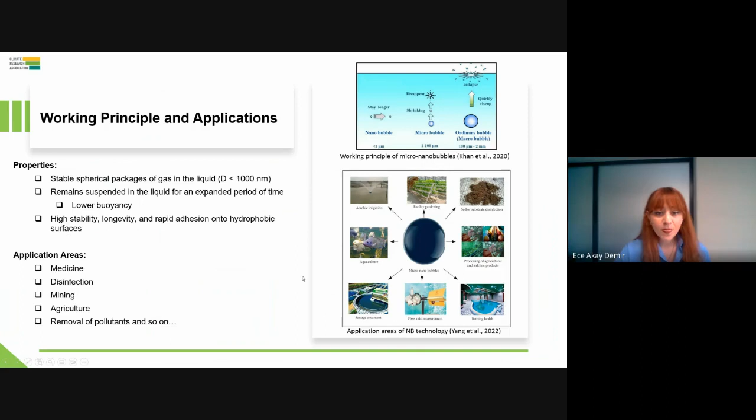If we look at the application areas or sectors more deeply, in agriculture or horticulture, they improve water quality, promote root development, foster plant health, and lower treatment costs. In lakes and ponds, they are more resilient to algae blooms, providing healthier lakes.

In anaerobic digestion, they enhance the rate-limiting steps, increase water mobility, and enhance substrate digestibility. In aquaculture, they improve fish and ecosystem health, maximize fish growth, and therefore lower the operating costs.

In the oil and gas sector, they can be cost-effective, causing chemical reduction and water recycling, and reducing chemical use. In mining, they accelerate the leaching rates and therefore provide extraction efficiency.

In the wastewater treatment sector, they can also be used in different stages of treatment like aeration, flotation, or disinfection. In aeration, they can improve oxygen supply efficiency and degradation of pollutants. In flotation, they can increase collision probability and separation efficiency. Lastly, in disinfection, they provide approximately 99% faster reduction rate, lower ozone requirements, and smaller tank size.

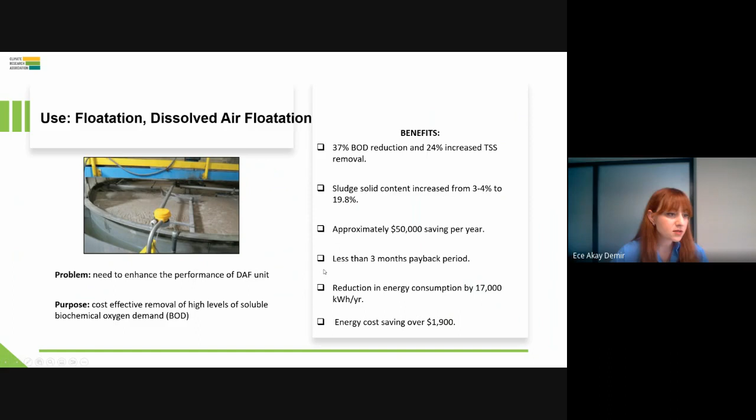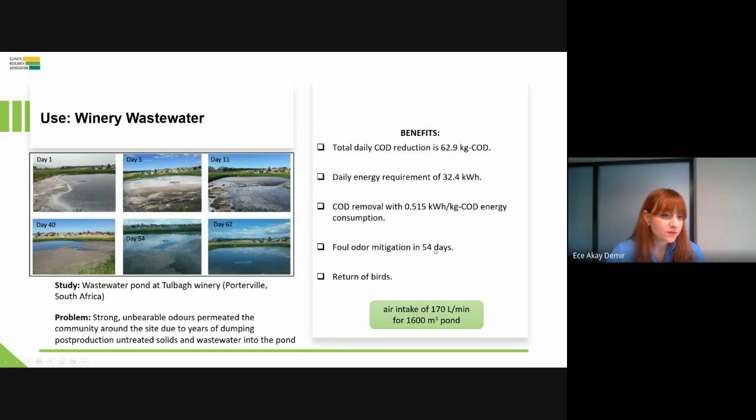Another example is winery wastewater. This study was conducted in South Africa. The problem is strong, unbearable odors permeated the community around the site due to years of dumping, because they discharge their winery wastewater into this pond. They used a nanobubble device with air intake of 170 liters per minute for this pond with a volume of 1,600 cubic meters, and they achieved total daily COD reduction and reduced energy requirement. COD removal is higher than the current station, and full odor mitigation was provided in 54 days. Therefore, birds returned to their natural habitat.

Another example is aeration of an oxidation ditch at a municipal wastewater treatment plant. The problem is the heavy wash down made it impossible to raise the oxygen level, resulting in improper treatment. The benefits are rapid installation, delivering more oxygen than needed, and enabling operators to easily switch between pure oxygen and air. Dissolved oxygen is increased from 0.11 ppm to 3.6 ppm in the outer ditch, and sludge amount is reduced as expected.

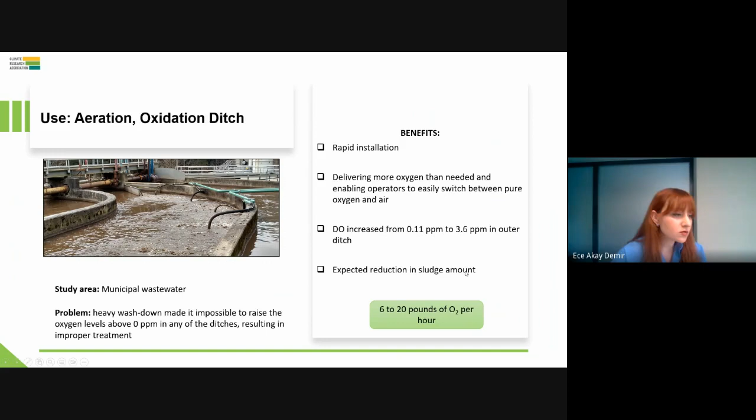Another example is from the oil and gas sector. The study is conducted for an oil separation process, which varies between 80% and 90% effectiveness, resulting in oil loss. They use nanobubbles and increase the oil recovery rate by approximately 15%.

They also reduce the produced water volume, lower produced water transfer volume, reduce use of chemicals to treat emulsion, reduce oil transport demurrage, improve oil and water transport scheduling, and reduce site supervision, saving about $15,000 in 60 days. The yearly potential revenue is about $100,000.

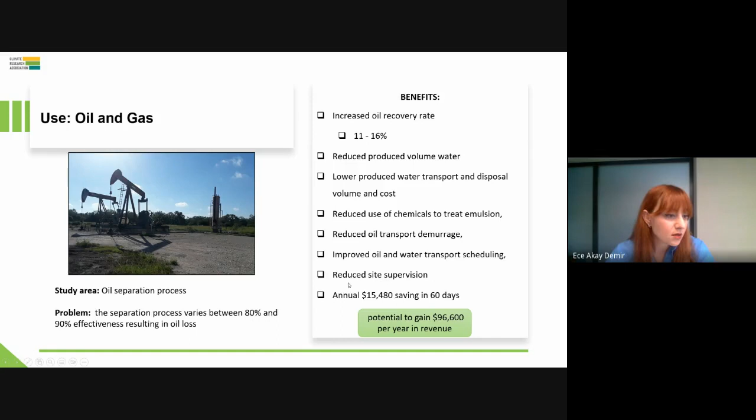Lastly, in the agriculture sector, the study area is a greenhouse that recirculates water, including nutrients and dissolved oxygen, to the roots of the plant. The problem is delivering enough oxygen to plants, so they also use nanobubbles, providing about a 300% DO increase.

The payback period is 16 months, which is slightly okay. Cultivation time is reduced from 10 weeks to 8 weeks, and total revenue increased. As a final result, they have healthier plants and larger roots.

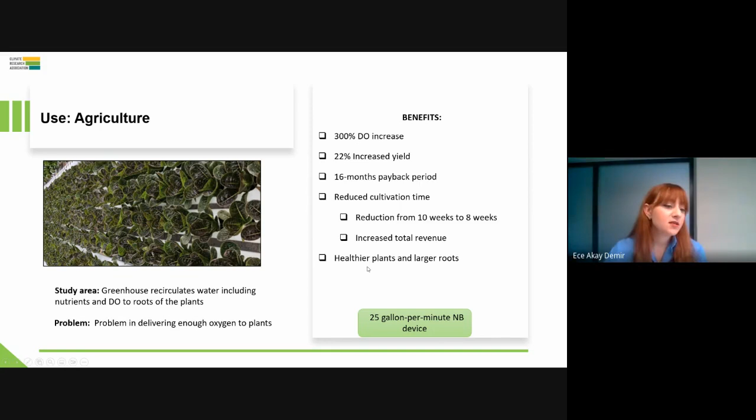We examined such examples and studies and merged approximate results in a matrix here. As you can see, in lots of application areas the process efficiency is high. Successful practice examples exist in the world, cost savings are high, and payback periods are very low. As mentioned, in the wastewater sector, application areas are divided into three processes: aeration, flotation, and disinfection. The results are also very good.

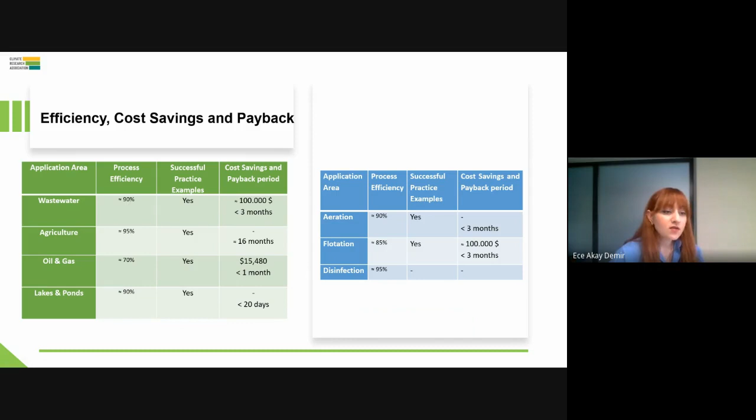Now I want to go through Turkey and its potential, because climate change effects on water are felt significantly, as in the whole world. Therefore, usage of nanobubbles in the wastewater sector might be valuable, so we analyzed it deeper.

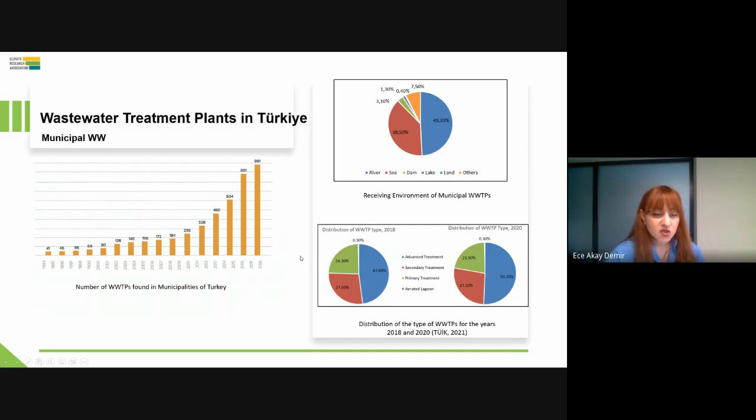In this respect, we held lots of stakeholder meetings with organized industrial zones, industries, and municipal wastewater treatment plants, and took feedback from them. Some sectors, like textile or plastic packaging, have very water-intensive processes and need feasible water recovery actions.

In the majority of firms, the major water consumption area is green area irrigation. Some of them have plans to use only recovered wastewater in their processes, but most can't achieve this due to lack of technology, lack of budget, and such problems.

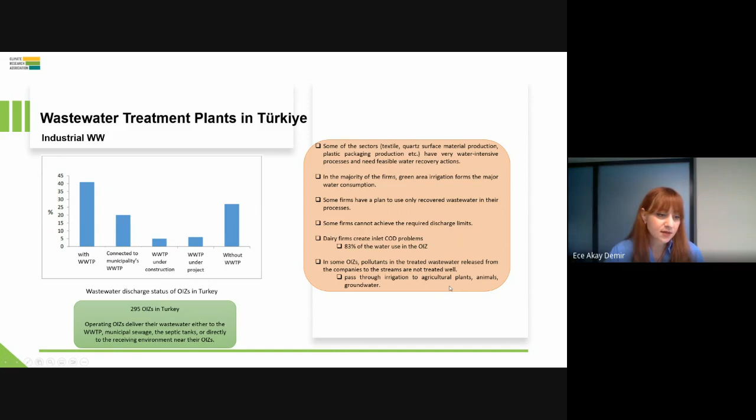Some firms cannot achieve the required discharge limits. For example, dairy firms create inlet COD problems, and 83% of water used in the OIZs comes from there. In some organized industrial zones, pollutants in the wastewater released from companies to the streams are not treated well, and due to this it passes through irrigation, agricultural plants, animals, and finally, unfortunately, groundwater.

In this respect, nanobubbles will provide not only more effective treatment of water and water recycling, but also protection of natural water resources, because these basins mostly have low class in terms of water quality. These classes and basin prioritization are determined by the Ministry of Environment, Urbanization and Climate Change in Turkey. The list order shows the Akarçay, Meriç-Ergene, and Gediz basins are prioritized in terms of pollution.

Looking deeper, in the Akarçay Basin, water resources are under significant pressure from urban and industrial discharges. Advanced treatment and effective biological treatment procedures must be implemented, as most water parameters exceed the limits, which is a problem in this basin.

In the Meriç-Ergene Basin, pressure from industrial wastewater and untreated or insufficiently treated urban wastewater discharge is a problem. A significant portion of the COD load comes from industry, and some parts of the basin are heavily polluted, for example the Çorlu stream; Ergene is a very big problem in Turkey regarding this.

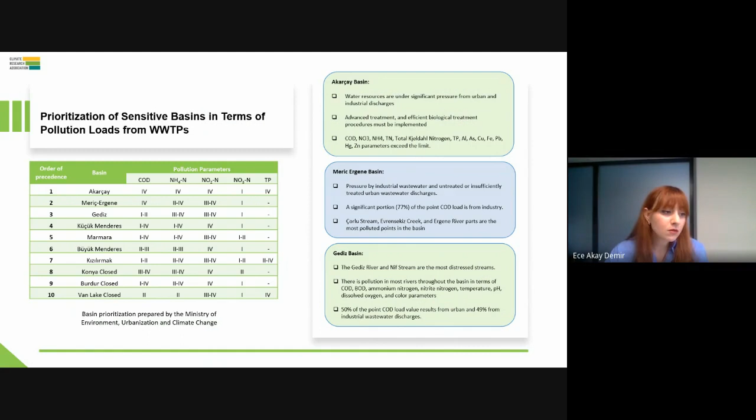So if you want to protect natural resources and provide water recycling in order to conserve natural water resources, we need to take some technological renewables. And to come up with the final notes, I want to mention needs and potential, to summarize this.

We aim to focus the water sector to transfer this technology to Turkey, because organized industrial zones with high water consumption and water scarcity, along with sensitive basins especially, should be focused in terms of the commercialization of this technology.

The wastewater originates from industrial organizations, and discharge of this wastewater into the receiving environment without treatment causes excessive pollution on the soil and vegetation due to the water pollution created. Heavy water consuming and highly pollution loaded organizations lack the capacity to treat the wastewater generated sufficiently, in terms of both quality and quantity.

It has been seen that in almost 50% of these sensitive basins, the pollution load problem occurs due to discharge from organized industrial zones into the receiving bodies. This ratio is expected to increase because organized industrial zones are not operating at full capacity by now, mostly organized industrial zones in Turkey, but they have very high potential. Therefore, the increase in water consumption is expected.

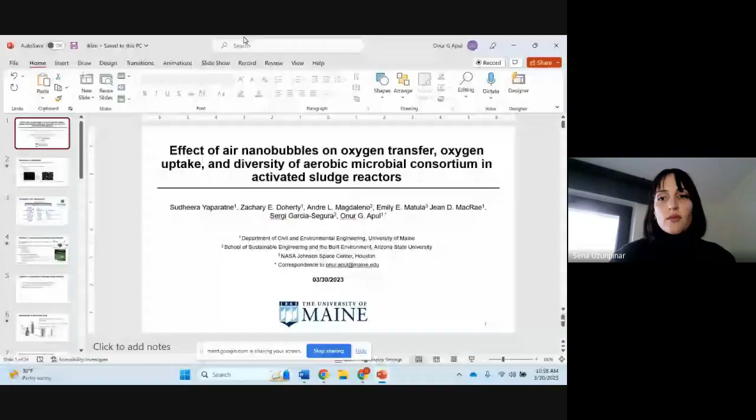Okay. All right. Are you able to see my whole screen as a slide? Yes, we can. Okay, well, thank you. Thank you again for organizing this. This is a very exciting project.

I'm going to present a lab study about nanobubble aeration for wastewater treatment. This study is led by Sudheera, a postdoc in my research group. My name is Onur Apul. Our group is at University of Maine, but as you mentioned, our collaborators are at Arizona State University, and the study was also first instigated by NASA Johnson Space Center.

This work is on the effect of air nanobubbles on activated sludge. I'm going to give some details about oxygen transfer, oxygen uptake, and diversity of the microbial consortium after nanobubbles versus traditional aeration. Most of these slides are prepared by Sudheera, and some at the end are prepared by my PhD student, my graduate student, Ashton Collins.

So I don't think I need to go through the definition. Obviously, nanobubbles present an opportunity because of their small size and lack of buoyancy. We didn't really believe they existed until very recently. Nanobubbles were a matter of debate because, being so small, their internal pressures would be very high, and they may implode or dissolve under this pressure. But in fact, we use some modern technologies to determine they actually exist, and their lack of buoyancy makes them not only exist but stay stable in a solution, in a suspension, for months, weeks.

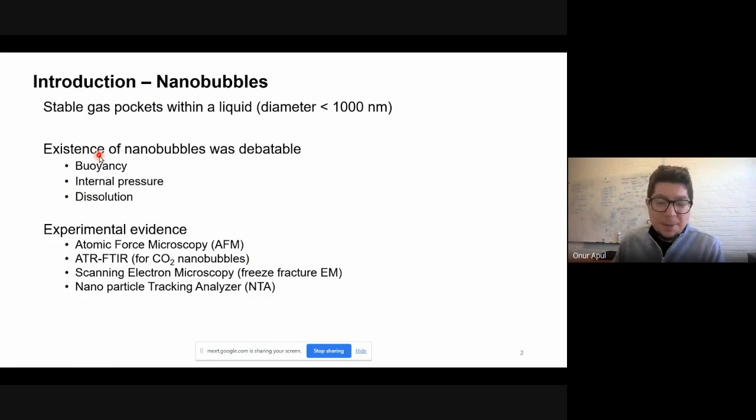So I think the best description is these videos. This one is taken by our collaborators at Arizona State University. This is a nanobubble, with a scale bar of 1,000 nanometers. You can see roughly a 100 nanometer bubble. With the flow direction, the bubble is moving, so you can see the contrast against the background. This is taken by a nanoparticle tracking analyzer.

This next video is from literature. It gives a more stark description of the stability and their independent Brownian-like motion. They are not impacted by each other. They are stable, just moving, vibrating a little bit. But as you can see, this technology can overcome the thermodynamic limitations of gas solubility.

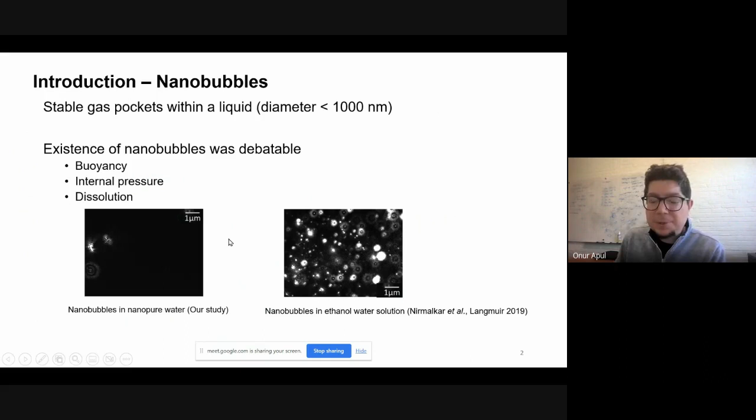If you can pack lots of bubbles in separate domains in water, then you are actually overcoming the solubility limitation at given temperatures. This gives an immense potential of application.

Typical aeration procedures suffer from large bubbles quickly rising to the surface from diffusers, and then on the surface they pop and disappear. Basically you have a pocket of gas, and you use this gas as a means to transfer the interface, to transfer gas into liquid. But since the bubbles are large, their retention time is really small. In a few seconds, they leave the reactor, and that interface is limited to the surface area of this bubble. Large bubbles mean small surface area, short retention time, and basically you are spending resources, money, air, to aerate.

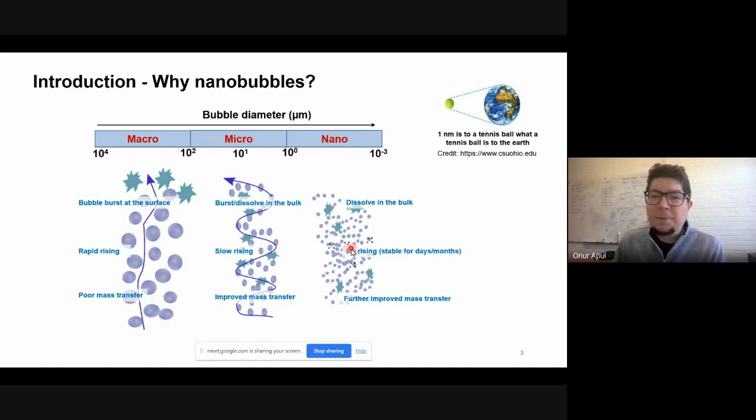There may also be a potential of transferring liquid phase compounds into gas phase in the form of aerosols, so pharmaceuticals and other concerning pollutants may be transferred through the surface of the reactor. Microbubbles have been implemented to decrease rising speed and increase mass transfer with increasing surface area, but they still suffer from short lifetimes. The transformative change is non-rising nanobubbles, as you saw in the video, basically moving in solution, and the extremely high surface area causes a further improved mass transfer.

For a general audience, activated sludge is a biological system where you have aerobic microorganisms and wastewater. The aerobic microorganisms use oxygen as a terminal electron acceptor and organic pollutants as electron donors through biological conversion. Basically they use nutrients, oxygen, and food, grow into biomass, and form carbon dioxide and water, mineralizing these pollutants into carbon dioxide while forming biomass.

To capture more food, they typically get more sticky on the exterior with a polymeric substance, meaning they eventually form a large flocculated biomass that settles down. That's how wastewater treatment works. Of course, oxygen is a key component - the more oxygen you provide, the better destruction of organics and the better growth of aerobic microbes.

A typical wastewater treatment plant, like our local treatment plant, is a 4.5 meter deep tank. At the bottom, you have diffusers. These diffusers are membrane type, so they blow up like a balloon as the pressurized air goes through, and they provide oxygen in the form of large bubbles.

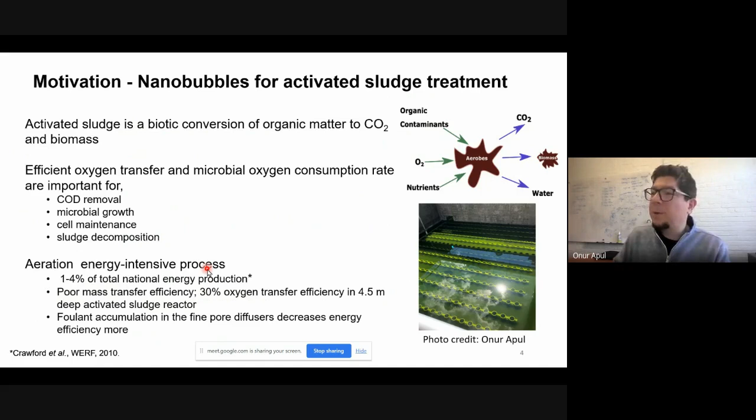That's why we think nanobubble technology presents an opportunity in terms of improving mass transfer without disrupting the microbial activity. Of course, microbial activity is not just one type of microorganism, it's a community of microorganisms doing the job together, so with nanobubbles we don't want to disturb this. Also the biomass eventually settles down - the solid sludge, we call it sludge - and the sedimentation also should not be disrupted.

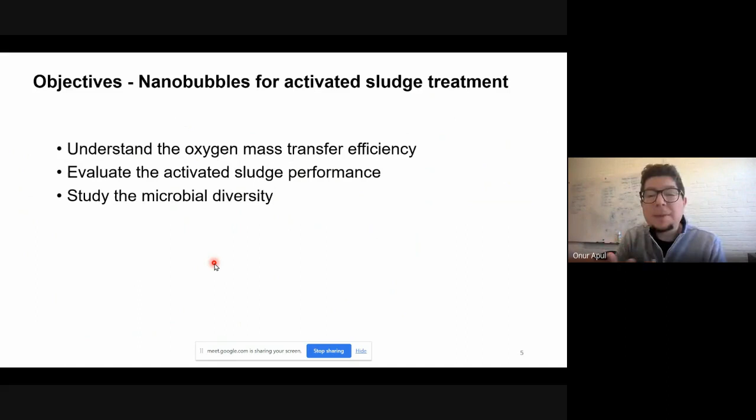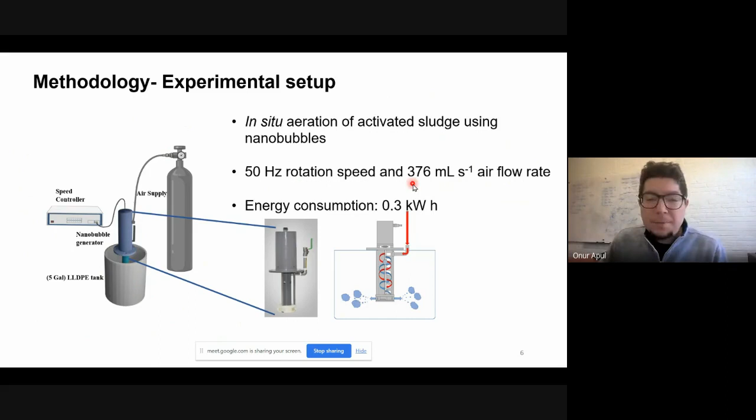So we did a bunch of systematic experiments in a bucket with a nanobubble generator. We used nanobubble aeration in situ for this batch reactor, providing this amount of air with and without nanobubbles to compare if nanobubbles make a difference.

Here is another video. This is nanobubble aeration - as you can see, that creates a vortex with this line. This white line is the gas input, this black one is power input. So you basically create tiny bubbles as this nanobubble generator operates.

And then we just take this offline and bypass it, applying the same amount of air in terms of regular bubbles - small enough that both of these reactors are fully mixed.

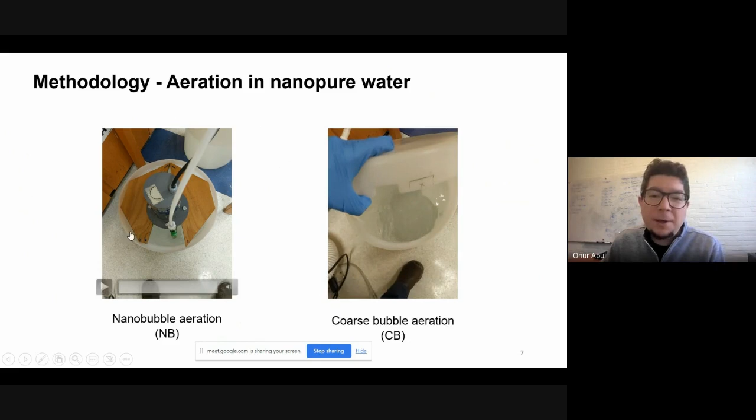The first results were obtained in distilled deionized water, a clean system. Nanobubble aeration created about 15% better oxygen content. In a matter of a few seconds - in fact our first data point was a minute - you are already more oxygenated, more aerated than with coarse bubble, which is the traditional coarse bubble aeration.

And if you don't aerate, this is the control - there is no change in oxygen content. So coarse bubbles increase dissolved oxygen slightly, nanobubbles increase it more.

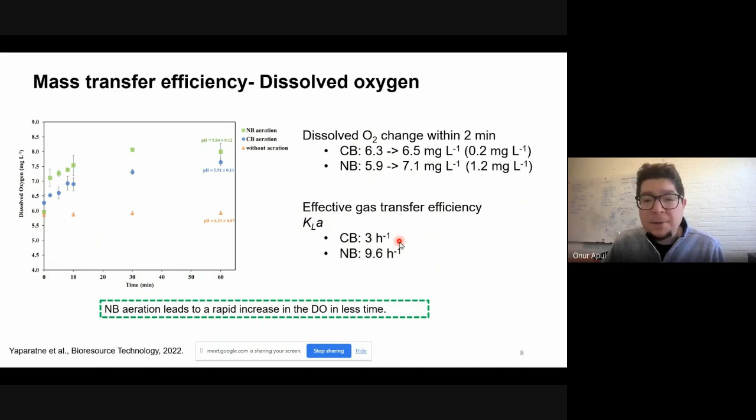If you convert this knowledge into gas transfer efficiency in terms of KLA, you are looking at a 3 times faster gas transfer efficiency with nanobubbles.

This is the quantification of nanobubbles, again in DI system. This 3D figure shows how big the nanobubbles are. They're typically always less than 500 to 600 nanometers. How many of them? We have a couple million of them, per each size. So these are all histograms.

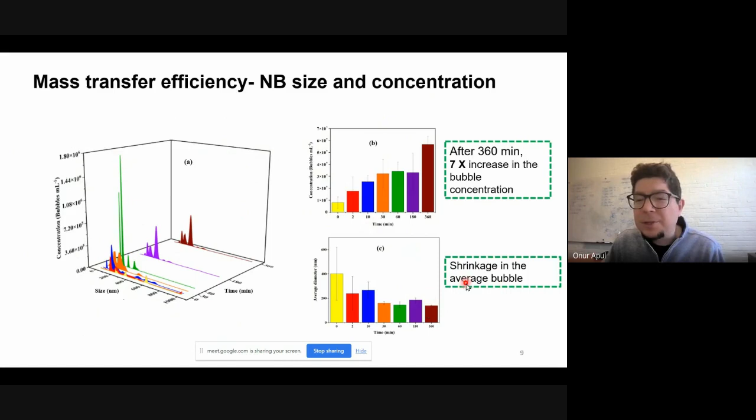If you condense this information into these 2 figures, as you aerate the system, the concentration of bubbles increases, so we don't lose them. We have about 60 million nanobubbles after 6 hours. Then their size gets smaller and smaller. Probably the large ones coagulate and leave the system, but the small ones remain. So as you aerate the system, you get a shrinkage in average size, but an increase in concentration.

Here is the next set of experiments where this time, instead of DI water, we took some sludge from a local wastewater treatment plant.

Same nanobubble system versus regular aeration. Again, we achieve complete mixing in both systems. And we have to assume, because there is no way we could measure nanobubbles with a microscope or nanotrack analyzer in sludge since it's such a dirty and complex matrix, that our measurements in DI water are deductive enough for this complex media. This is just an assumption.

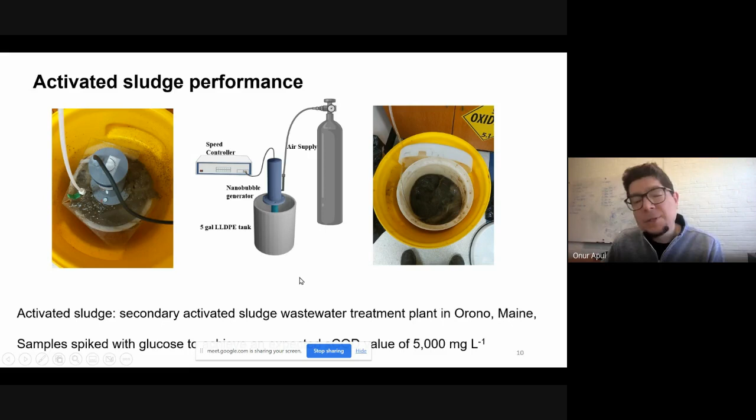Solubility efficiency aside, to make sure we don't disrupt the microorganisms, we counted the number of filamentous structures in the sludge, because filamentous bacteria is the backbone, the spine of a microbial floc. They attach to it and create these communities so they can settle down easily. If there's too much oxygen, filamentous bacteria lose their advantage and it's hard for them to be maintained, so they start disappearing from the system.

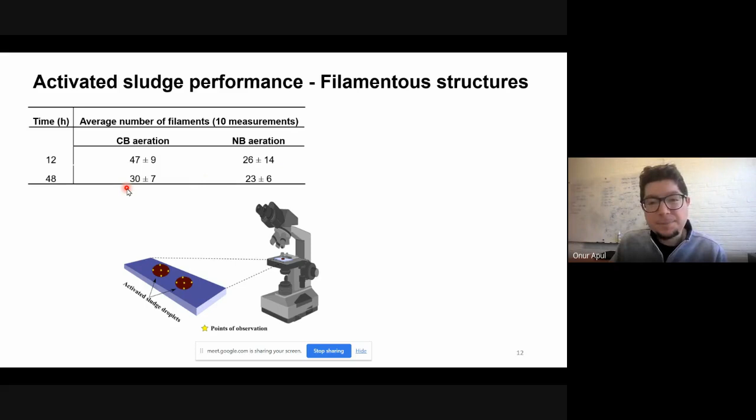Here's an example of filamentous bacteria that helps form a floc and makes it easier to settle down. As you can see, with coarse bubble aeration, the nanobubble aeration seems to settle better, but in fact the clean water or supernatant is actually more turbid.

So it basically had a negative impact on the way filamentous bacteria help clear the water. But in nanobubble aeration, we had less sludge because we basically converted them into carbon dioxide. In terms of turbidity of the supernatant, though, we didn't do as well.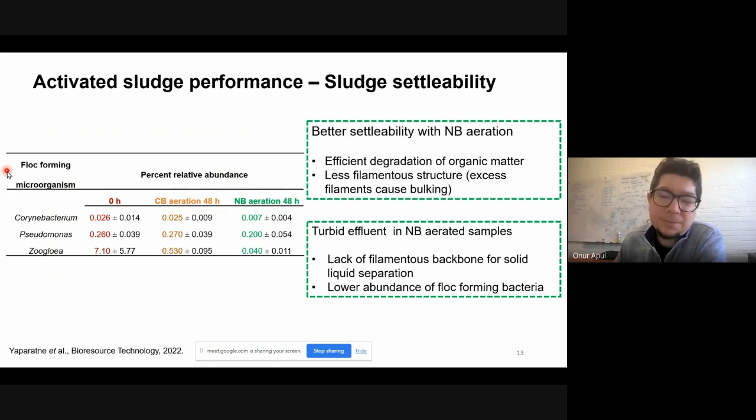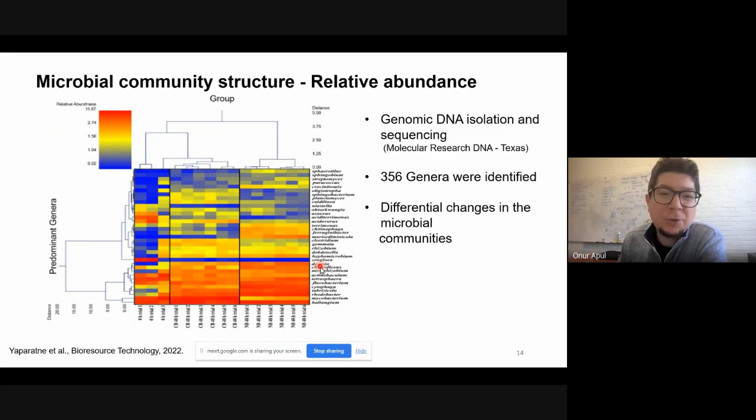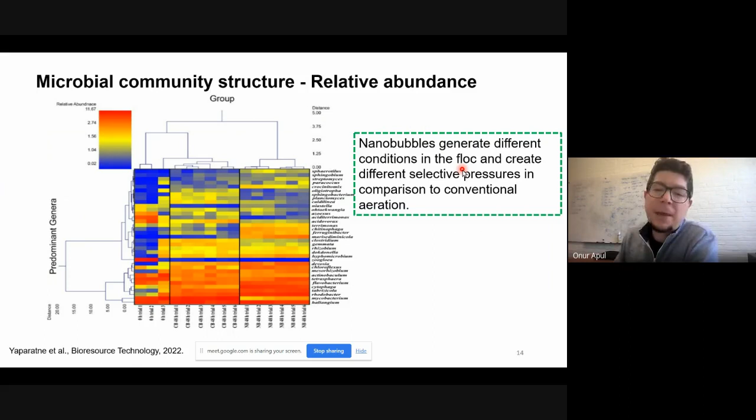Here's the 356 genera identification through DNA analysis. I'm not going to go into the details, but basically nanobubbles create a different condition, and this floc community changes drastically, giving some bacteria an advantage, altering the structure of the community in ways that require additional research.

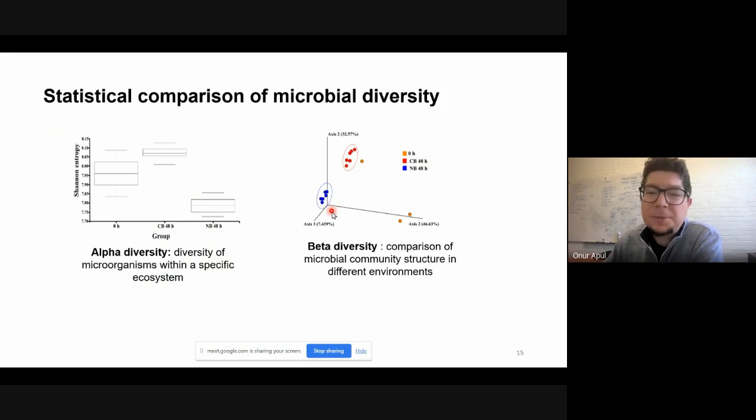This is just another way of representing the same data. Coarse bubbles versus nanobubbles form very diverse and different clusters of microorganisms.

So currently we are working on a model based on this wastewater treatment plant. We are trying to scale down these large diffusers - this is Ashton's work. We scaled it down by a factor of 1 to 34. We have these 75-gallon fish tanks, and we know how much to fill them to exactly represent the wastewater treatment plant.

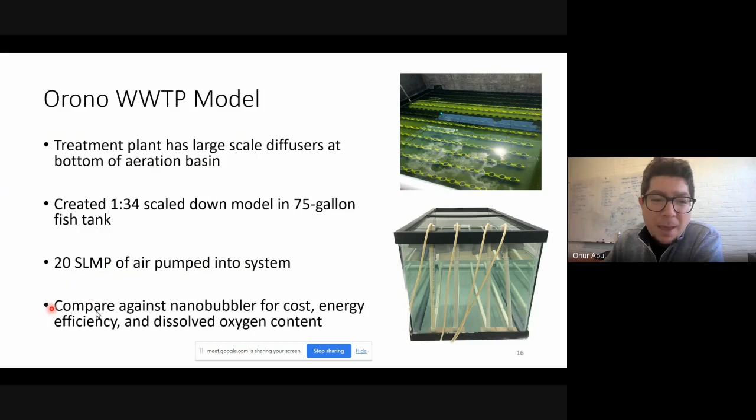All these pipes are actually connected to the same gas source, and though you can't see it well, they all have the same number of diffusers in the form of little holes. We pump 20 standard liters of air into the system per minute, and we compare nanobubbles in terms of cost and energy consumption. This is our nanobubble generator.

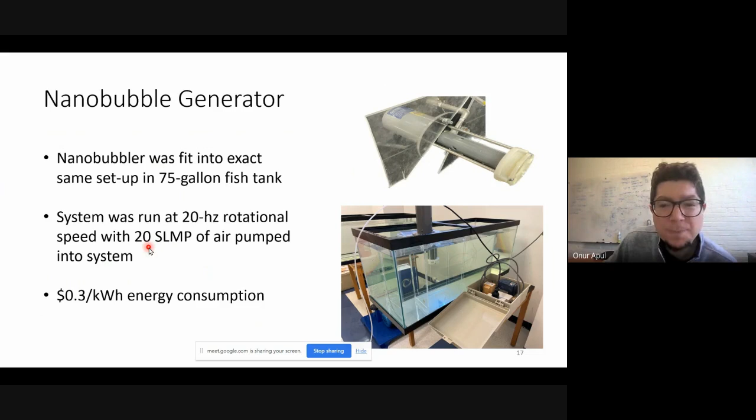We have 3 tanks right now, only one of them is set up, but Kenneth is working on setting them up. So we are comparing the same exact air inputs, but one with nanobubbler, one with regular aeration. This is a regular aeration that resembles aeration in a treatment plant with diffusers, and this is nanobubble aeration, side by side.

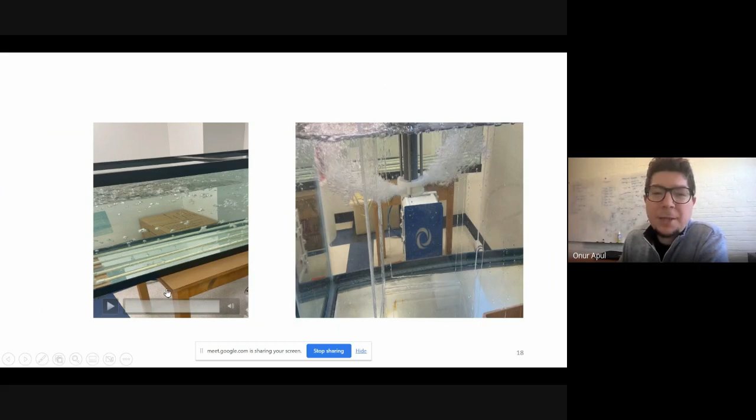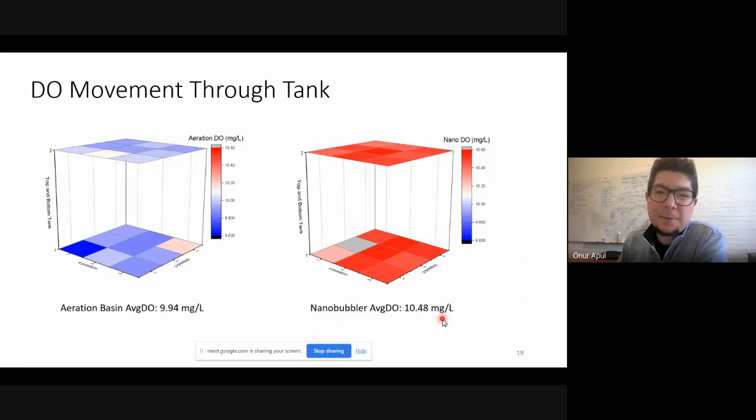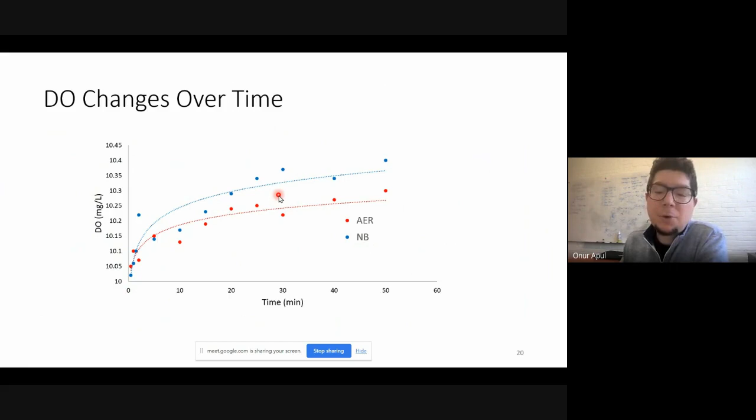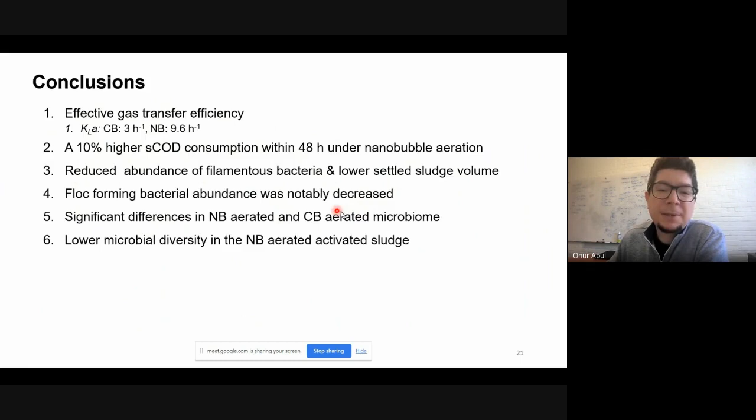With this, I would like to thank the funding agencies: Maine Space Grant Consortium, Town of Orono, which has helped us with the scaling down of the treatment plant, and also Climate Research Association for financial support.

Sudhira is not in the meeting today, but he's right here, he prepared most of these slides. Ashton is doing the cost analysis and cost calculations, and Zach helped collect these dissolved oxygen measurements in the system. So I'll stop sharing.

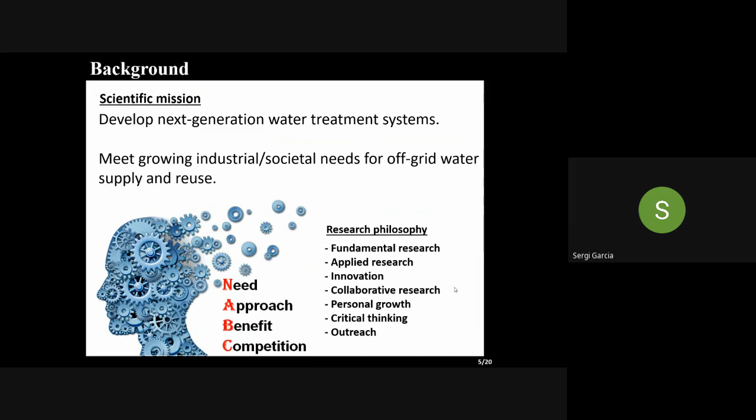The focus of the research in my group is mostly on developing new interfacial processes, which involve electrocatalysis, photocatalysis, and nanobubble technologies. In terms of the environmental and scientific motivation that we have, this is around the topic of water. We are very concerned about water issues, water pollution, and how we can remediate these issues.

If you think about water, water is the center of all the ecosystems on the planet, an element that we need for life as we know it. But our activity as humans in our daily life or industrial activities generates different kinds of pollution that dramatically affect the quality of our waters. And not only this, but it also affects all the living beings that depend on them, including ourselves.

And this is a challenge that's not only about us, it's about the future. And we have to think how we can transition to more green, sustainable, and efficient methods that enable this kind of water treatment and its reuse.

If we think in terms of the sustainable development challenges defined by the United Nations, clean water and sanitation is one of the main challenges that have been highlighted. Tons of people have no access to simple clean drinking water or even sanitation in the world. And if our holistic objective is to reach this goal of having access to clean water and sanitation for all before 2030, we are kind of delayed.

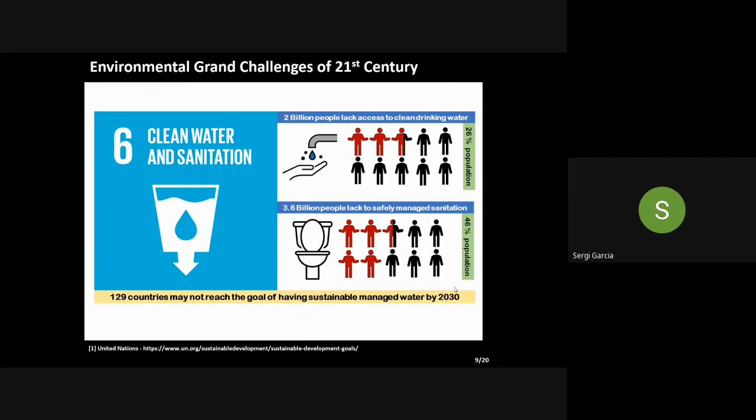If we are thinking on how we can achieve these goals and how we can ensure access to water, especially in water-stressed communities, as you were all discussing about the issues in Turkey, which is not only Turkey, it's all the world that's facing the same challenges, we have to envision and redefine our horizon based on new technologies that will enable us to reach these goals.

Here is where nanobubbles have a potential impact, and I will not spend a lot of time talking about them because the whole workshop is about this. I think that we have had a nice overview.

These nanobubbles, which are nano entities or nano-sized metastable gas particulates that have very, very small diameters, present unique properties induced by nanoscale effects. And these nanoscale effects are the things that we are especially interested in, and we are trying to elucidate how they can impact different water treatments.

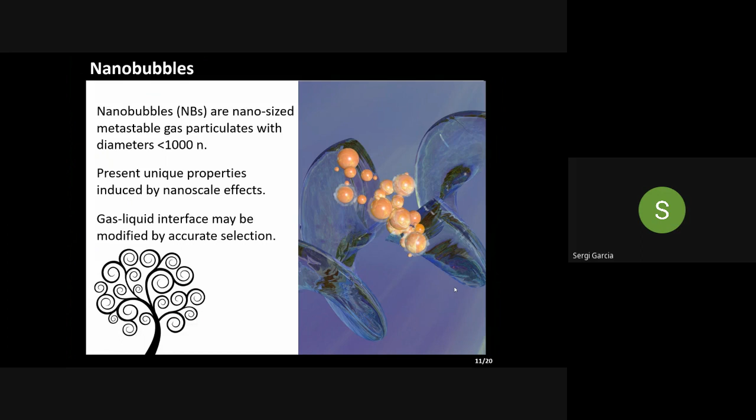One of the most interesting aspects of these nanobubbles is that the gas-liquid interface that we form can actually be modified by the accurate selection of which kind of gas we want to use.

When we think about these unique nanoscale properties that nanobubbles have, that can enact different possible applications in terms of water treatment, some of them were covered thoroughly in the first session, so I will not be entering into detail on how we can use nanobubbles for different applications.

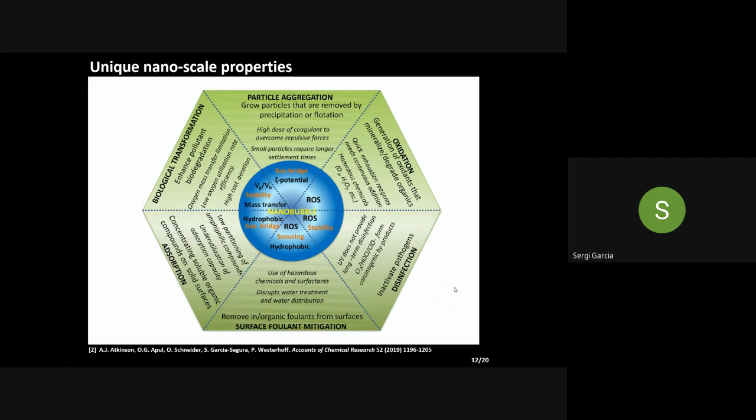I will focus a little bit more on why we are studying CO2. If we think about CO2, it's everywhere, isn't it? It's one of our greenhouse gases, but it's also part of many metabolic processes in the environment.

And it's extremely important because CO2 content in water is what provides alkalinity, which is a natural buffer capacity to control pH changes. And CO2 has many applications also nowadays.

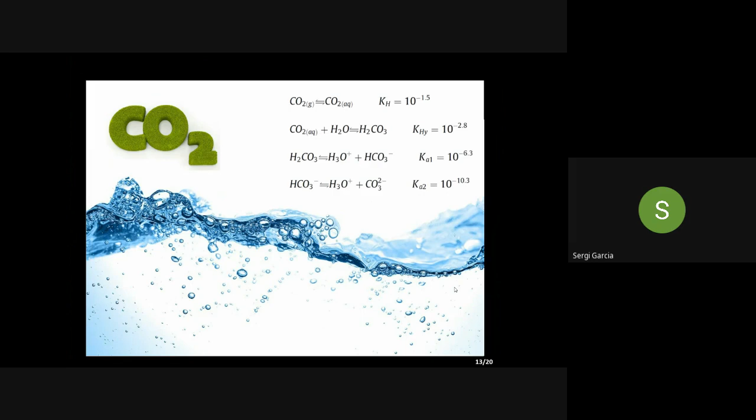CO2 is one of these gases that's very, very interesting because, as I was saying, it's part of the carbonate systems in the environment. It's an acid gas that can be dissolved in water, and when it gets dissolved in water, it actually reacts, forming carbonic acid. This carbonic acid has two different species, hydrogen carbonate and carbonate, that can remain in solution and control drastic changes in pH.

So the objective of this study was to understand a little bit more how the CO2 nanobubbles' interfacial reactivity, since this is a reactive gas that can be dissolved in water generating acid-base species, can impact the water chemistry.

So what we did is we worked with a system treating 50 liters of water. 50 liters is starting to be something kind of like a big volume of water. And when we bubble CO2 nanobubbles in there, we can see drastic differences between conventional bubbling and nanobubbling.

So what I was mentioning here is that this can actually revolutionize the way that we deliver gas into gas-starving systems, because we can change drastically these physical-chemical parameters of the water.

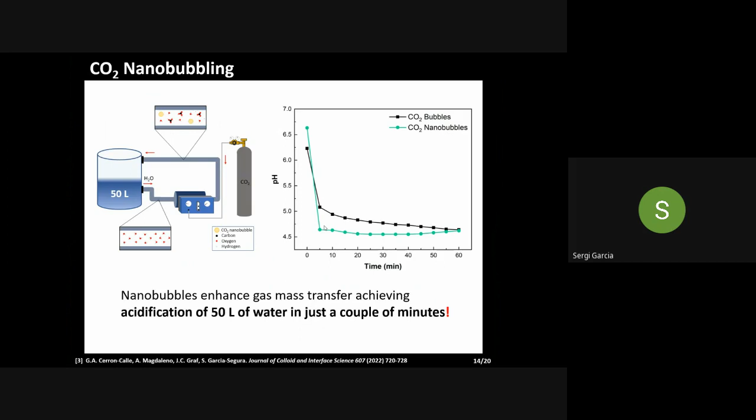Other aspects we were interested in, besides this drastic, fast change of pH, is what we call the volumetric mass transfer coefficient. What is this volumetric transfer coefficient?

Think about a two-film model: we assume hypothetical stagnant film layers of gas and liquid at the gas-liquid interface. There's a gradient of concentrations from the gas species to the bulk liquid, which results in dissolution of these species. This is how we usually deal with any system that requires gas, like the one Onur described for aerobic treatment. We need to deliver gas into the system.

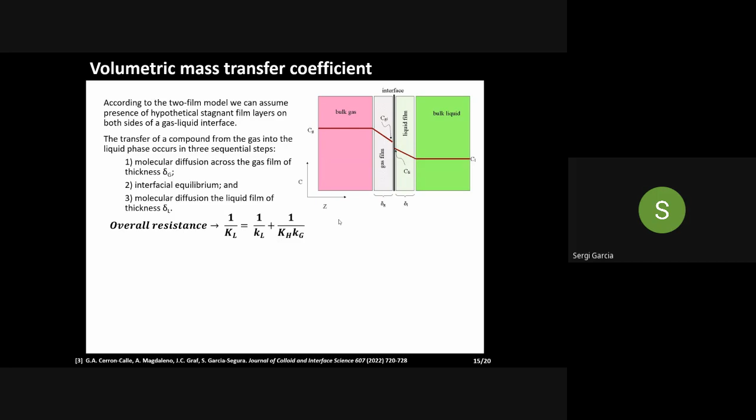There are 3 sequential steps that are very important. First is diffusion across the gas film of thickness delta, moving concentration from the bulk of the gas toward the bulk of the liquid. We have interfacial equilibrium at the boundary between the two phases. Then there's another molecular diffusion from the liquid film to the bulk liquid. This translates into resistance for the transport of these species, represented by this equation. I won't go into detail, but when considering transfer of CO2 into water, which also involves a chemical reaction, these expressions look like this, where KLA, our volumetric mass transfer coefficient, indicates how fast we can transfer gas into the liquid phase.

When we do these calculations and compare our nanobubble system with our macrobubble or coarse bubble system, we see a difference of one order of magnitude. In fact, using nanobubbles, we can get 11-fold higher mass transfer than traditional bubbles. That's without even talking about the higher efficiency of gas transfer, because nanobubbles have a smaller diameter and a huge interfacial area that favors this transport.

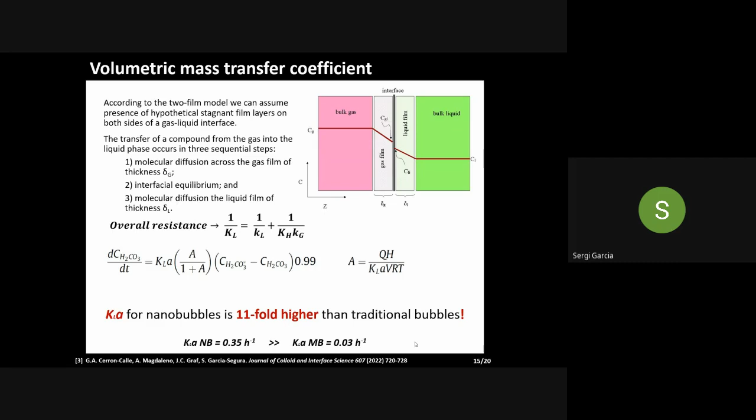And the question that Onur mentioned before, which a lot of scientists have been discussing for a long time, is: do nanobubbles exist in solution? The answer to this question is yes.

The other question we ask ourselves all the time, since we're talking about bubbles that are metastable and present in solution, is how long these nanobubbles last. This is a very interesting question because it depends on many factors. Is this an open system to the environment? If it's open, it may reach equilibrium faster, so the nanobubbles may disappear faster than in a closed system.

For open systems, which is most cases, in the case of these CO2 nanobubbles, we conducted a study of their stability over time and saw that they can last over a week. In a conventional bubble, once formed, it rapidly leaves the solution very quickly, with a retention time in the liquid of probably 1 or 2 seconds, tops. For nanobubbles, that means our interface of gas remains in solution for 7 days in the case of CO2, giving us much more time and more efficient contact of the gas with the water, enabling the transport we discussed before.

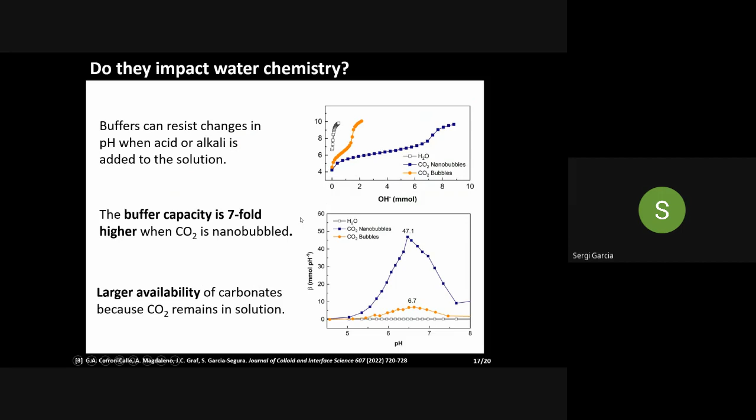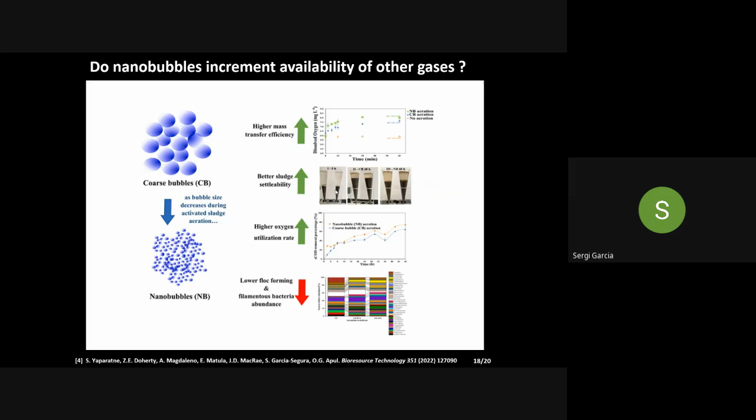The other question that we may have is, do these nanobubbles increment availability of other gases? And the answer is yes. So the work that Onur was presenting before, which you can find the reference here, I recommend reading this interesting article, demonstrates that we can use different gases and increment the performance of any gas-starving system, like for example the aerobic treatment. And this has not only impacts on the performance of our system, but also impacts on the biovolume of the sludge formed. So we can actually reduce the biovolume of our system, which is where high expenses are associated to these biological treatments, in how you treat this volume of sludge.

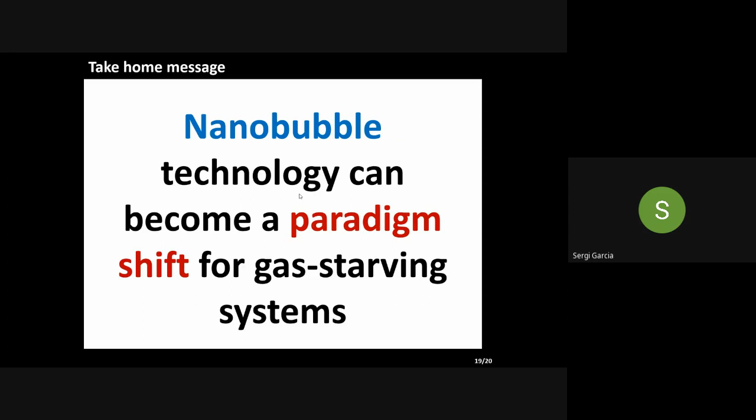So to finish the presentation, which was kind of short, we had only about 15 minutes, I would like to share a main take-home message. And this main take-home message is that these nanobubble technologies can actually become a paradigm shift for gas-starving systems. Any gas-starving system that you can imagine, any technology that requires gas or interface of gas in a liquid, nanobubbles can actually increase them very, very much, at least on the scale of an order of magnitude.

And that means that the opportunity is just ahead. All this study on opportunities of nanobubbles has actually demonstrated all the potentials that these technologies may have, but still we have a lot of work to do prior to successful market implementation. There are a lot of efforts from industry demonstrating that these technologies work better than conventional aeration systems, but we need a scientific proof, which is what we are trying to do in collaboration with Onur, to demonstrate why these technologies work better. So thank you very much.

I will be happy to answer any question if there is any. And I will share, as Onur did, the photo of my group. This work was conducted in part by André Magdaleno and Gabriel Cerrón Calle. Both of them are now PhD students in my group. So thank you very much. And Sena, I give you the torch back.

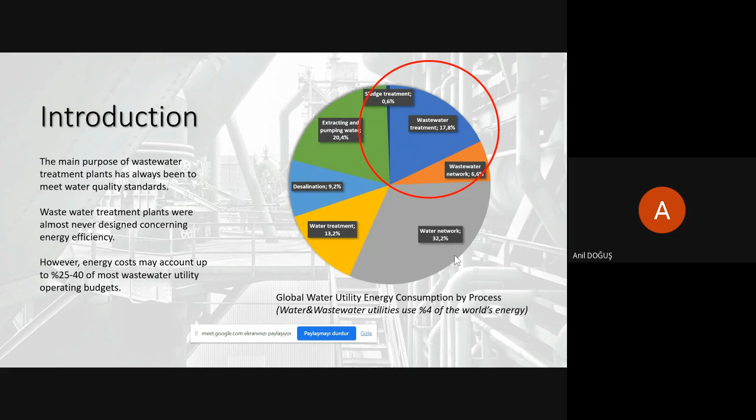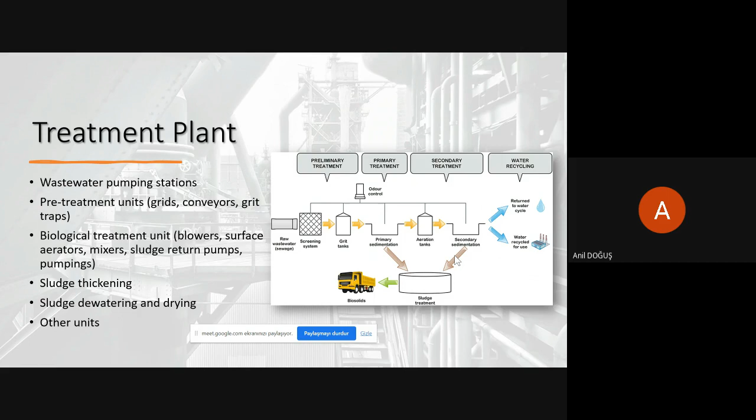In wastewater plants, there are some KPIs that help us understand the energy efficiency level or energy savings potential of the plants. The first one is energy consumption per meter cube of treated wastewater. This value ranges between 0.28 and 0.61.

The second one is the energy consumption per year per person that this water plant supplies. This range is between 27.4 to 47.9. And the last one is the energy consumption per chemical oxygen demand.

As a rule of thumb, as wastewater solid concentration increases, the specific energy consumption decreases. The specific energy consumption increases as the actual load, rather than nominal capacity, decreases, and a higher nominal capacity generally means lower specific energy consumption.

Also, in a conventional typical wastewater treatment plant, there are three main energy consumers. The first one is the aeration process, the second is pumping and sludge pumping, and the third is sludge dewatering processes.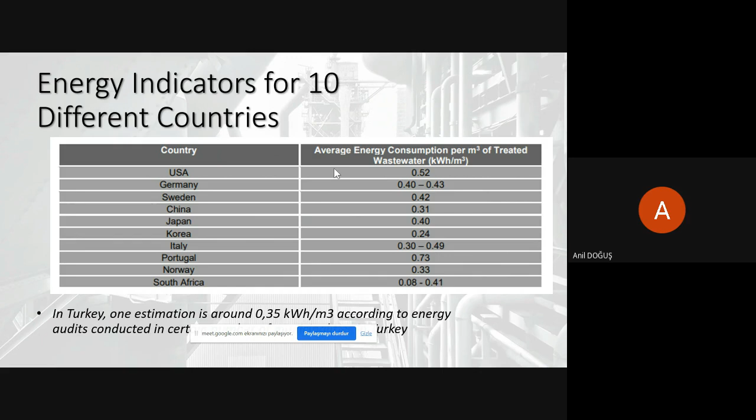Regardless of the sector or facility, energy efficiency is a holistic approach. In wastewater plants, there are key elements that affect the energy efficiency level or energy savings potential: resource-plant supply nexus, degree of solid concentration in the wastewater, wastewater amount and characteristics, hydraulic condition of the plant, treatment process technology, plant equipment technology, plant age, chemical resource requirement, and energy supply or energy sources.

In a facility-based energy approach, there are four key elements. The first is operational efficiency. The second is equipment technology. Third is behavioral impacts. And the last is predictive maintenance.

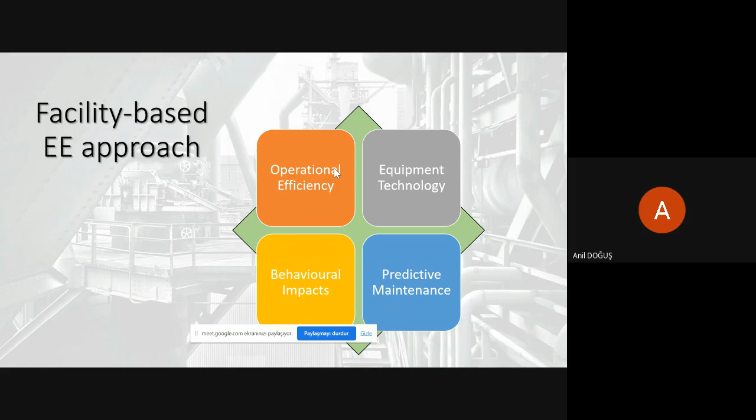While assessing energy efficiency, we focus on three areas. The first is energy efficient equipment or systems. The second is energy generation, such as biogas or gasification. The third is renewable energy generation, either with solar energy or hydroelectricity. Of course, independent studies should be carried out on each subject while preparing or assessing the energy efficiency roadmap of the wastewater plant.

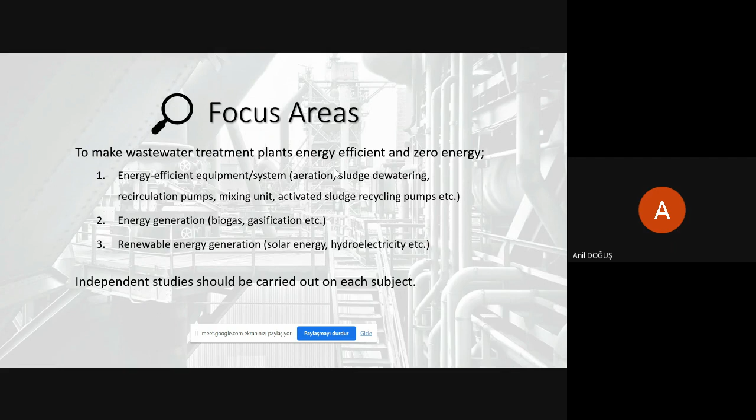In terms of equipment, as I said earlier, the main energy consumers are pumping systems, the aeration unit, and the sludge treatment unit. In these units, we need to assess pump efficiencies, blower efficiencies, air compressor efficiencies or waste heat recovery potential, aeration automation, bubbling aeration efficiency, lighting efficiency, electric motor efficiency, transformers, treatment at source if possible, mixer efficiency, free flow water circuit, and recovery of backwash waters.

In pumping, aeration, and sludge treatment processes, there are some typical projects that can be implemented: installing variable speed drivers on pump systems, replacing motors and pumps with high efficiency models, and using automation systems to optimize operational parameters.

In the aeration unit, this means replacing inefficient blowers with energy efficient ones and installing variable speed drivers. And in the sludge treatment unit, it means improving the dissolved air flotation thickening process and replacing centrifuge equipment with screw presses or gravity belts.

In the context of this workshop, nanobubbles also have significant effects on energy efficiency in the plant, thanks to two advantages. The first is that they can diffuse and disperse in the wastewater volume more efficiently, thus increasing aeration efficiency.

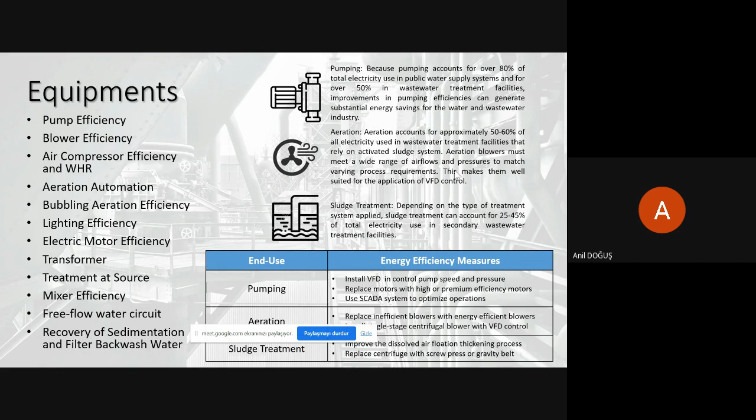In renewable energy technologies, we can analyze biogas cogeneration systems. We can produce facility electricity, use the waste heat to heat up spaces, and also use that waste heat to dry the sludge.

Also, in photovoltaic systems, on-site production can help reduce the plant's electricity demand. Heat pump options can also be assessed, and wastewater can be used as a heat source for water-sourced heat pump systems to produce hot water, which can also be used in space heating or drying processes.

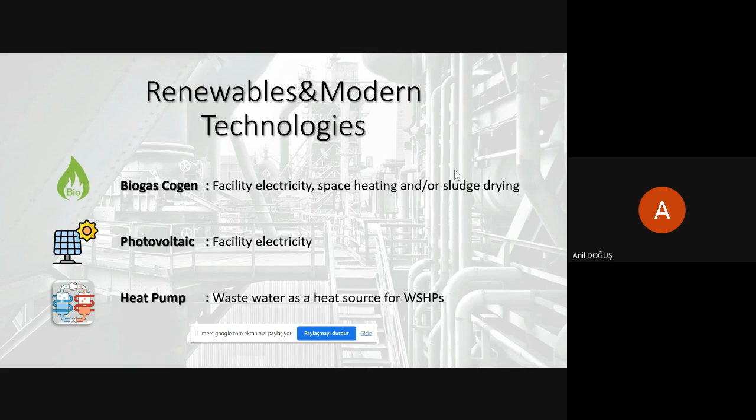Of course, there are lots of projects. In order to evaluate these projects, we should use a prioritization matrix to decide which projects will be implemented first.

In order to do that, we developed a simple matrix that consists of 4 key parameters. The first one is project effect on system scale, savings at system scale. For example, a variable speed driver can increase pump, motor, or blower efficiency by, say, 40%, but may not have a substantial effect on plant energy costs, though it does affect equipment.

The second one is savings at plant scale. For example, biogas or photovoltaic systems have substantial effect on plant energy consumption. The third one is technical viability. Again, a variable speed driver is an easy project to install, but a photovoltaic system is more complicated.

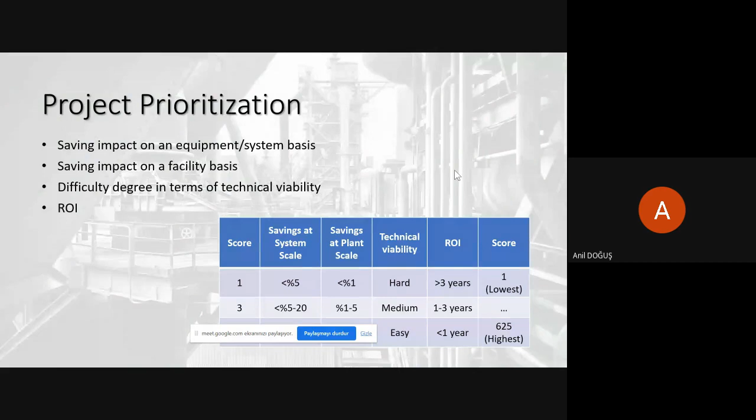And the last one is return on investment, of course - the less, the better in this topic. So we should analyze the projects in terms of these parameters and score them from lowest to highest, and we can decide which project will be first. Of course, facilities should develop and expand this matrix according to their own priorities.

That's all from me. Thank you very much.

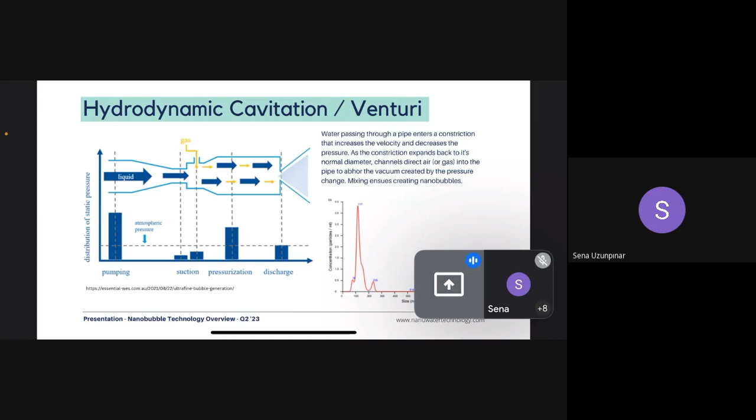And on the right-hand side, you'll see a chart from NanoSight, basically showing the typical distribution and size of nanobubbles produced from this method - very similar to the chart that Sergey showed with those 4 different varieties.

Electrolysis is another method that's used mostly in academia. I haven't seen many commercialized products from any companies yet, but this method essentially uses electrodes coated with 15 to 30 nanometer layers of a variety of different substances. Some use polymer electrolytes, membranes, aluminum, palladium, platinum, or graphene oxide.

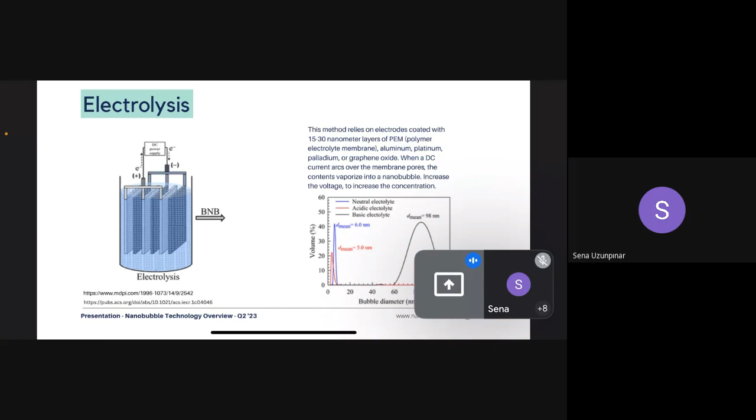Whenever a direct current is passed through these electrodes, it arcs over the membrane pores and the contents vaporize to produce nanobubbles, and when you increase the voltage, it increases the concentration. This distribution can be very different depending on the type of electrolyte used in the solution that the electrodes are in.

Ultrasound or acoustic cavitation is another method. This one can both create and destroy nanobubbles, so there's a fine line there, and a wide range of frequencies are used to do either. That's one of the things that Onur's team is exploring. In medical settings this has a profound effect in localized treatment: medicine delivered via nanobubbles into the body, then an ultrasound device can be used to burst those bubbles in a zone where there's a wound, surgery, or a tumor, delivering medicine in a highly concentrated way to a very specific area of the body.

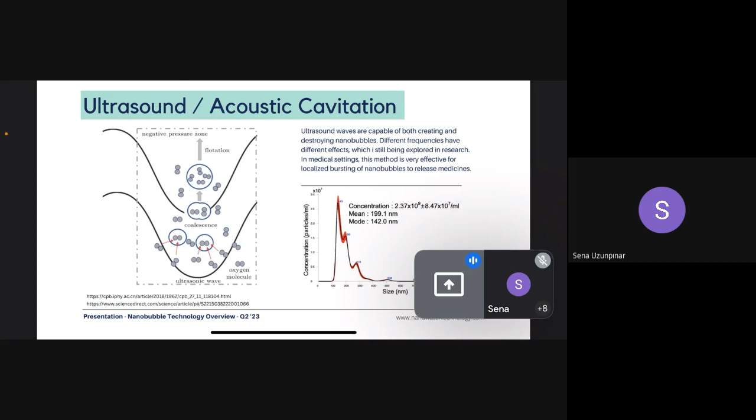Periodic pressure change is another method. A common analogy is a syringe with water and some air inside, capped at the end. You pull the plunger back to increase the volume, changing the pressure, then push it back in to compress it. Doing that over and over changes the boundary condition where the water meets the air, allowing you to generate nanobubbles.

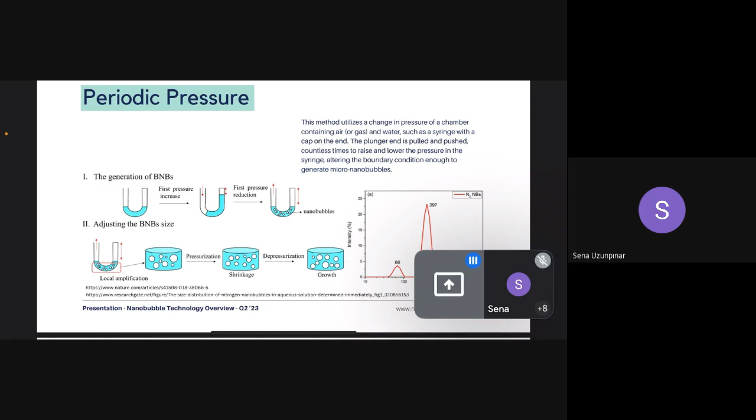Then there's the hammer mill, or water hammer, which I believe is the device Onur was using in the photos he showed on his slides. This method forces water and gas into nanobubbles using a wide variety of very small hammers on a central axis that rotate at about 3,000 RPMs, producing nanobubbles in highly measurable concentrations. I haven't been able to find or source an actual NanoSight profile chart, which is why it's missing from this slide.

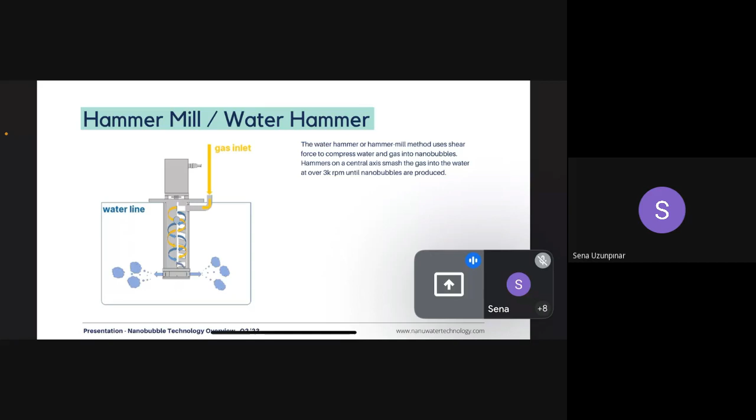Within the nanobubble market, competitors and trends, there are about 45 companies around the world since about 2015. Moleaer is the most well-known one, and Acniti is the second most well-known, from Japan. Then there's a handful of others, including ourselves, focusing on expanding the technology.

Within that realm, most trends in the nanobubble market show companies focusing on agriculture and wastewater applications, really trying to increase throughput and get flow rates higher so they can be integrated into municipal wastewater treatment facilities, as well as large aquaculture and agriculture operations involving soil, going beyond just indoor agriculture. Not many companies are scaling down their technology for lab settings, or exploring SDG contributions toward climate impact or new market opportunities.

Here at NANU, within our agriculture program, we're working with Gold Standard in the EU and abroad, and Verra here in the US, to create carbon credit programs for the farmers we work with, so they can have a passive revenue stream from nanobubble treatment using our direct air capture devices. The nanobubble capture itself is a negligible volume, but its impact on plant growth — upwards of 10 to 30% increased yields — in turn increases carbon capture in the soil, which can be converted into carbon credits through verification processes.